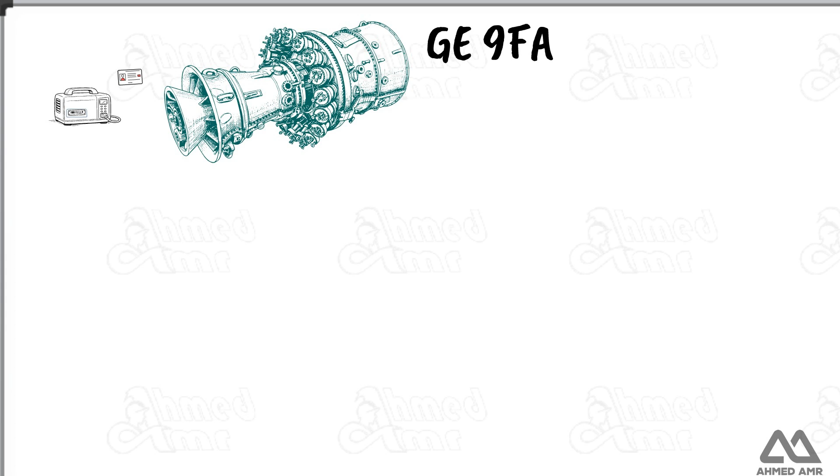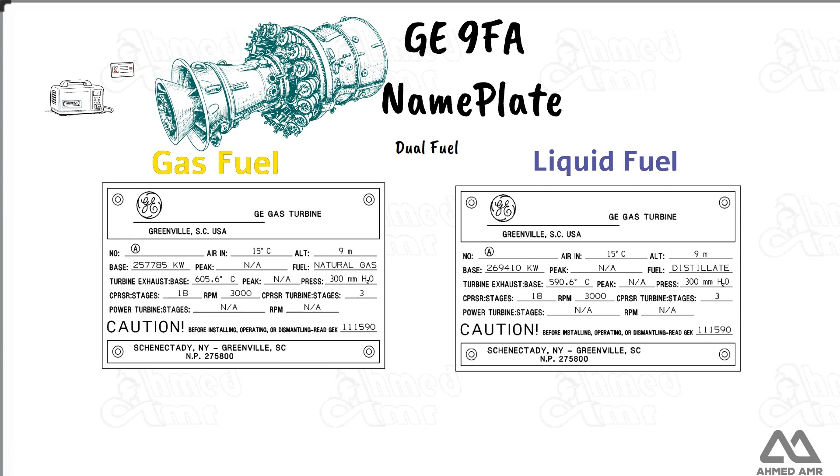Here we see the two nameplates of this unit, one for gas fuel operation and the other for liquid fuel or diesel, because this turbine is dual fuel. Let's start with gas operation. At the top, we see the title GE Gas Turbine and the General Electric logo.

This information indicates the place of manufacturing or assembly, which was done at the GE factory in Greenville, South Carolina, USA. Here, there is a space for the turbine's serial number. Each unit has a unique serial number that identifies it in the manufacturer's records. For example, 298742. This number is mainly for the manufacturer's internal reference.

Next, we have the air inlet temperature according to standard design conditions, known as ISO conditions. This means the performance listed on the nameplate is calculated at an air temperature of 15 degrees Celsius. The altitude above sea level is listed here as 9 meters. Now we see the fuel type, natural gas. This means all the following data is calculated for operation on natural gas.

The word base refers to base load, which is the maximum continuous load of the turbine as tested in the factory under the stated conditions. The value is written in kilowatts, which equals 257.8 megawatts. For peak, we see NA, which means there is no data for peak load. This unit is designed to operate at base load only.

Now let's look at the exhaust gas data. The exhaust gas temperature at base load is 605.6 degrees Celsius. There is no peak value as mentioned earlier. The pressure shown here refers to the exhaust pressure leaving the turbine. Its value is 300 millimeters of water column, which is approximately 0.42 psi, or 0.03 bar.

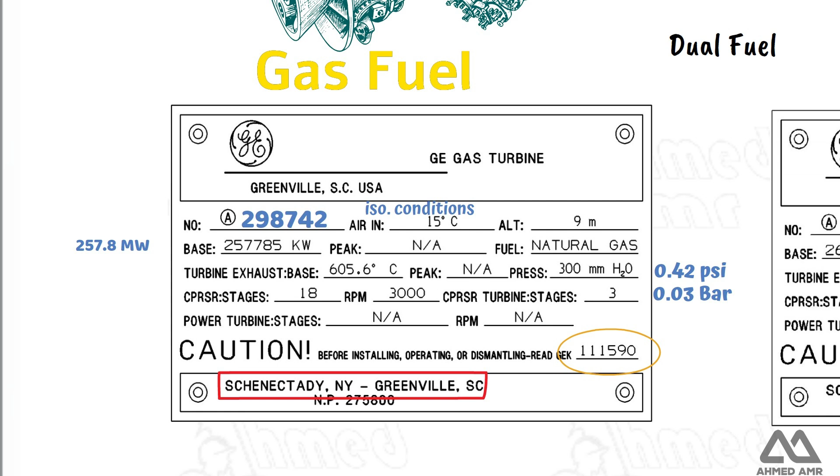Below that, we find a safety warning. It states, before installing, operating, or dismantling, read the manual with this number. This refers to the General Safety and Instruction Manual. At the bottom, we see the main GE locations, Schenectady, New York, and Greenville, South Carolina. Finally, this is the design number or internal code of the nameplate.

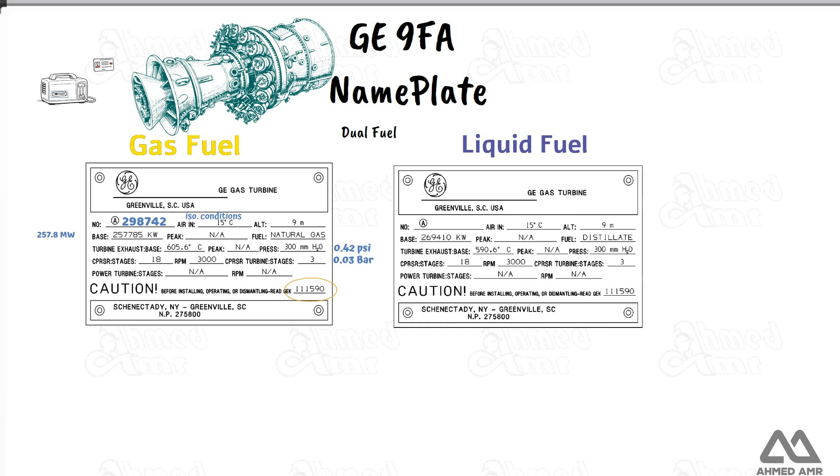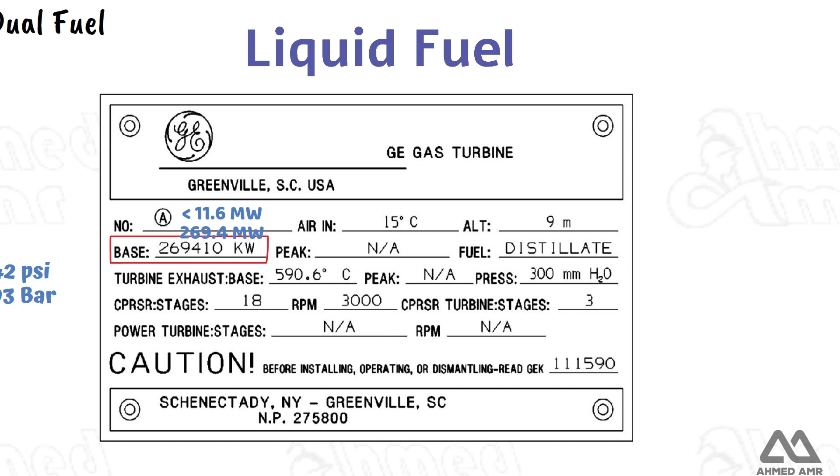Now, let's move to the nameplate for liquid fuel operation, also known as distillate. It states that the fuel used is light diesel fuel or distillate fuel oil. Changing the fuel type affects both the output power and the exhaust temperature. Here, the output power is 269.4 megawatts, which is higher than gas operation by about 11.6 megawatts. At the same time, the exhaust temperature is lower than gas operation by about 15 degrees Celsius. The rest of the data remains unchanged.

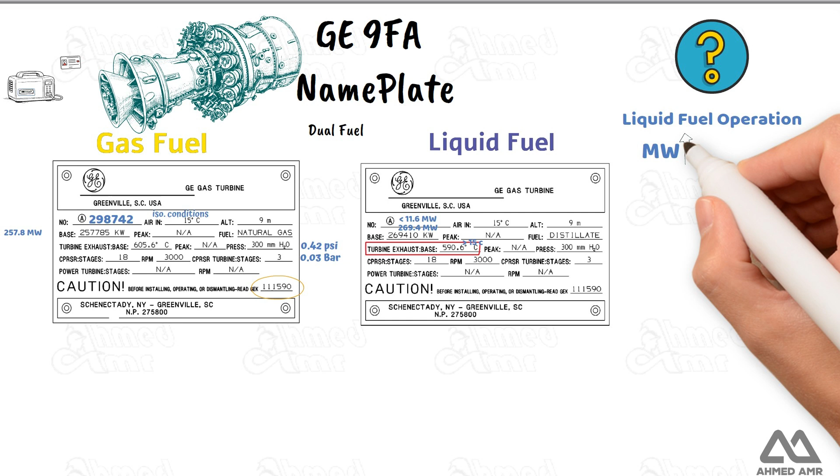Now, a question for you, and I will wait for your answers in the comments. Why does operating on diesel increase the power and reduce the exhaust temperature under the same conditions compared to gas operation? If you like, we can answer this question at the beginning of the next lesson.

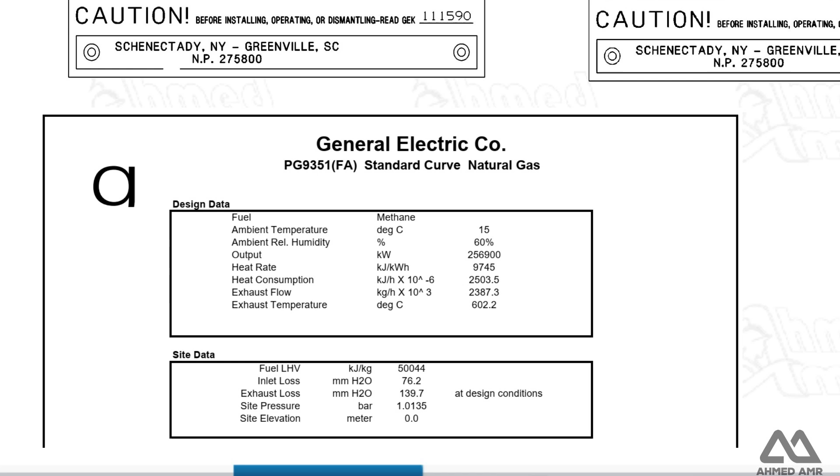Now we move to another file that contains data related to the turbine and the site where it is installed. These are real operating data, and they may differ slightly from the ideal conditions listed on the nameplate. In the table called Design Data, we find the performance values that the manufacturer guarantees if the specified conditions are met. The first item is fuel type.

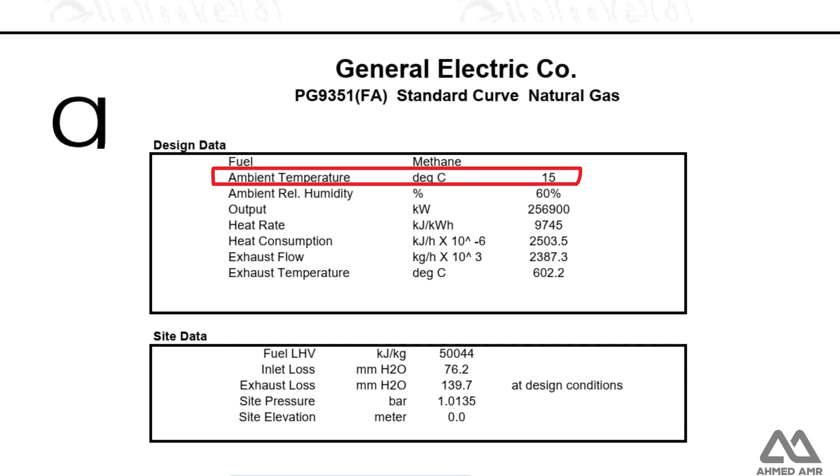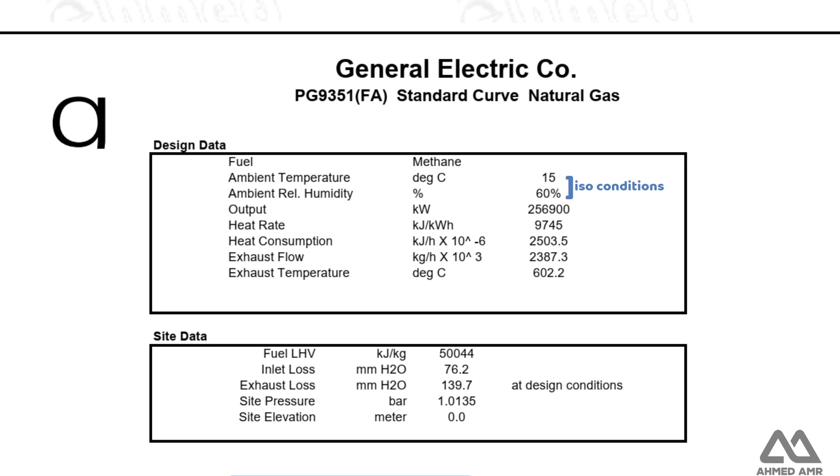The fuel here is methane, which is the main component of natural gas. The ambient temperature is 15 degrees Celsius, and the ambient relative humidity is 60%. Together, these are called ISO conditions, which are the standard reference conditions used to measure turbine performance. Of course, these conditions are not always available. This means that if the temperature is 15 degrees and the humidity is 60%, the performance will be as stated. Under these standard conditions, the output power is about 257 megawatts.

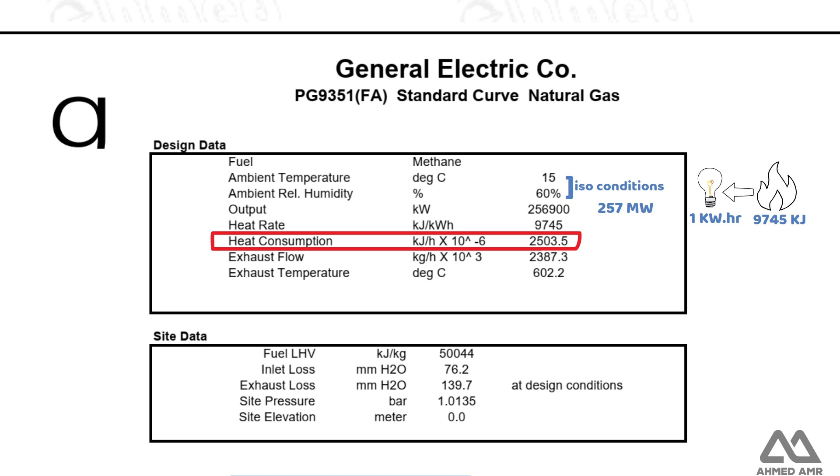Next, we have the heat rate, 9,745 kilojoules per kilowatt hour. This means to produce 1 kilowatt hour of electricity, the turbine needs 9,745 kilojoules of heat from the fuel. The heat consumption represents the total thermal energy the unit consumes per hour at full load. In this case, the unit consumes about 2.5 billion kilojoules per hour under ISO conditions. Simply put, this value is the heat rate multiplied by the power output.

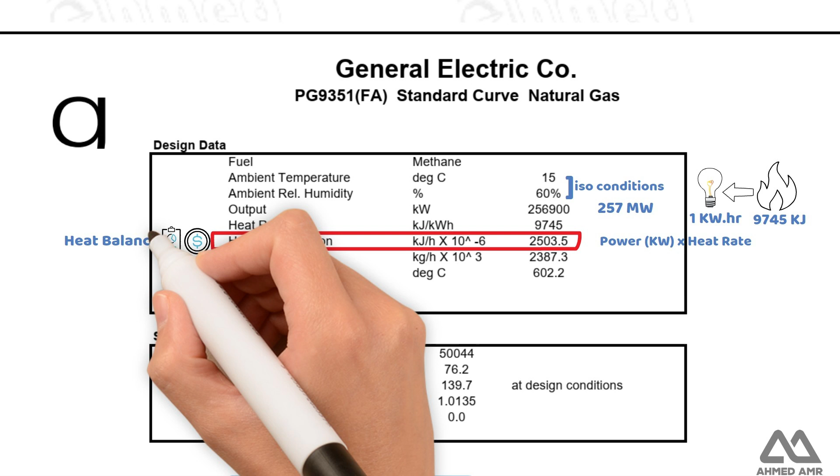Why is this number important? It is used to calculate daily fuel cost in performance reports and in heat balance calculations for combined cycle power plants. Next, we have the exhaust gas flow rate, which is 633 kilograms per second. This value is very important for the design and calculation of the heat recovery steam generator in combined cycle operation. And here we see the exhaust temperature at base load.

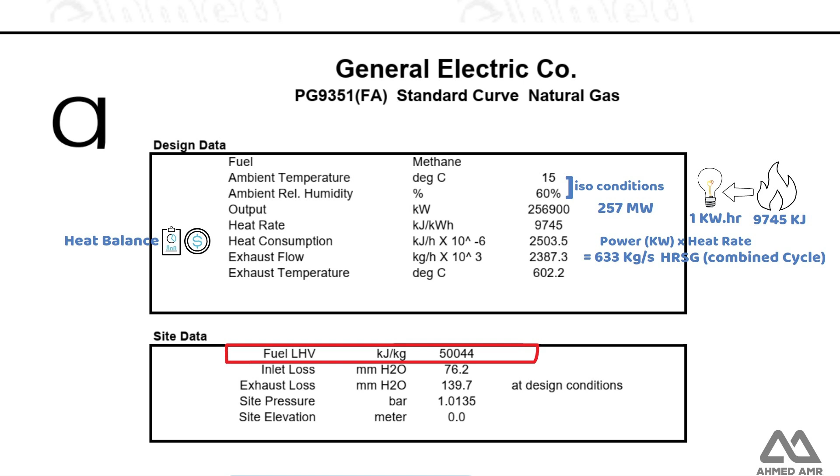The second table is called site data. It represents the real operating conditions of your actual power plant site. The first item is fuel lower heating value, or LHV. This represents the useful thermal energy obtained from burning 1 kilogram of fuel. In this case, burning 1 kilogram of gas produces 50,000 kilojoules of useful energy. The lower heating value of gas is not constant.

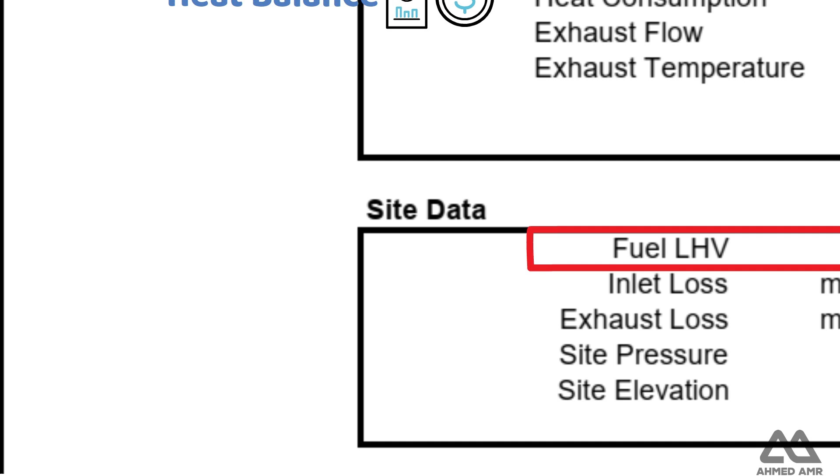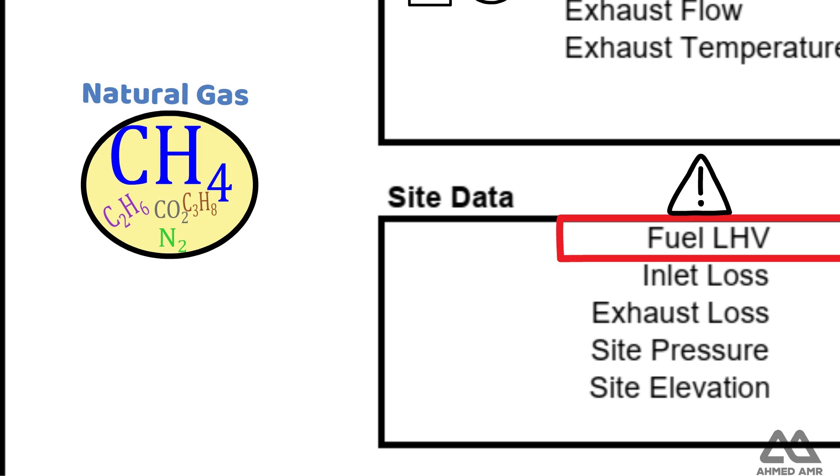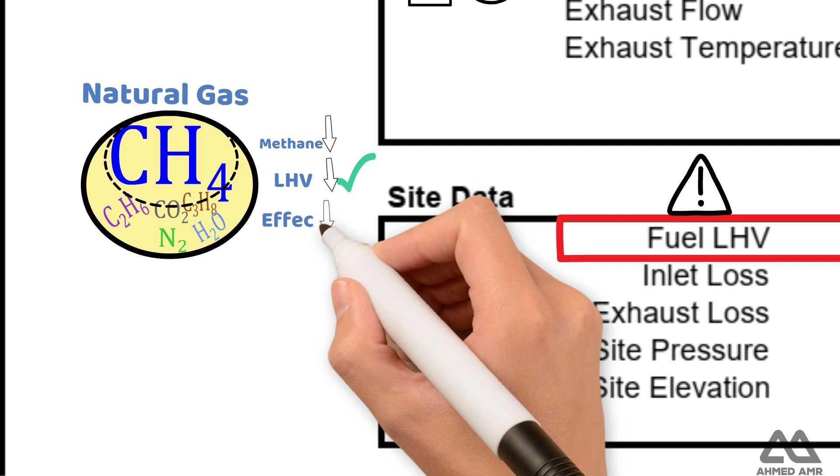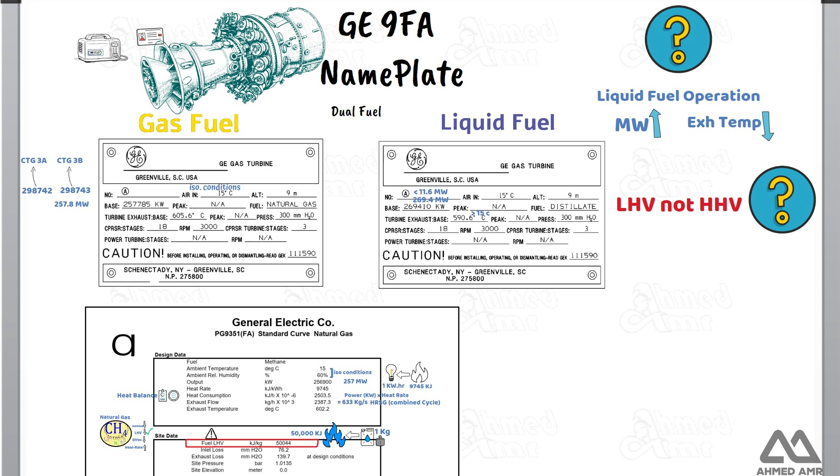The chemical composition of natural gas varies from field to field. Each field produces gas with a different mixture of methane, ethane, propane, nitrogen, carbon dioxide, and water vapor. The higher the methane content, the higher the LHV, and the better the fuel quality. If the methane content decreases, overall performance drops. Efficiency decreases, heat rate increases, and fuel consumption increases. Another question for you. Why do we use the lower heating value instead of the higher heating value in gas turbine calculations, and what is the difference between them?

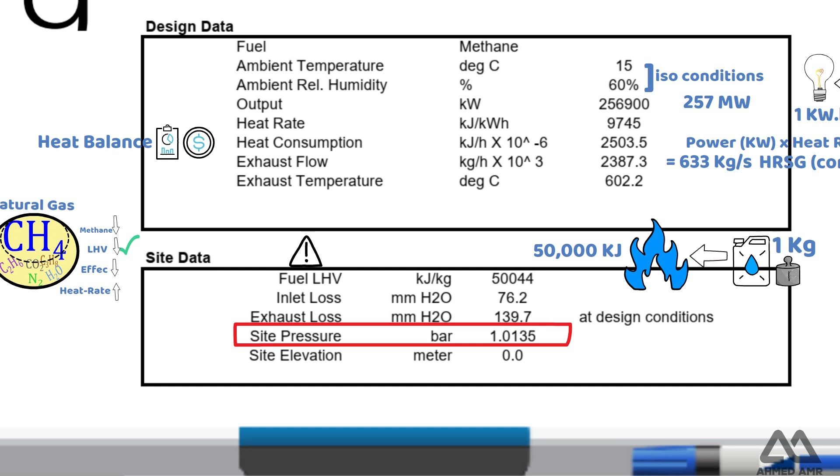Next, we have inlet loss, 76.2 millimeters of water column. This is the pressure loss at the air inlet caused by filters and ducts. The higher the inlet loss, the lower the turbine performance. Exhaust loss is 139.7 millimeters of water column. This represents the actual exhaust pressure loss measured on site. Site pressure is 1.0135 bar, which is the atmospheric pressure at the plant location. Site elevation is 0 meters, meaning the plant is located at sea level.

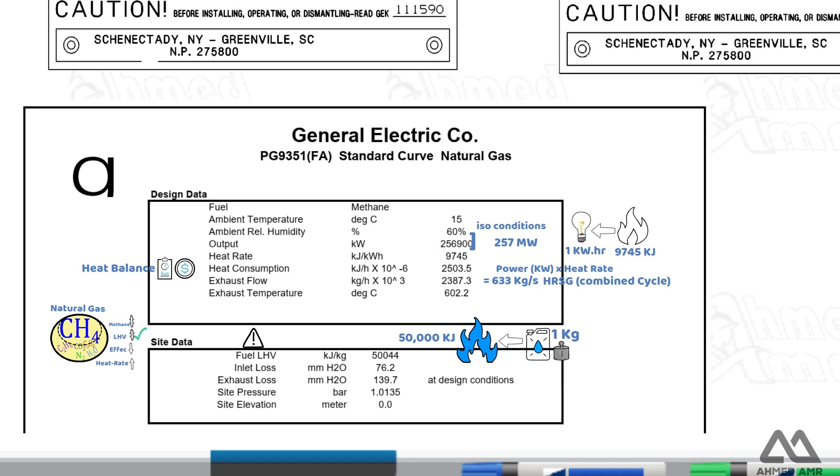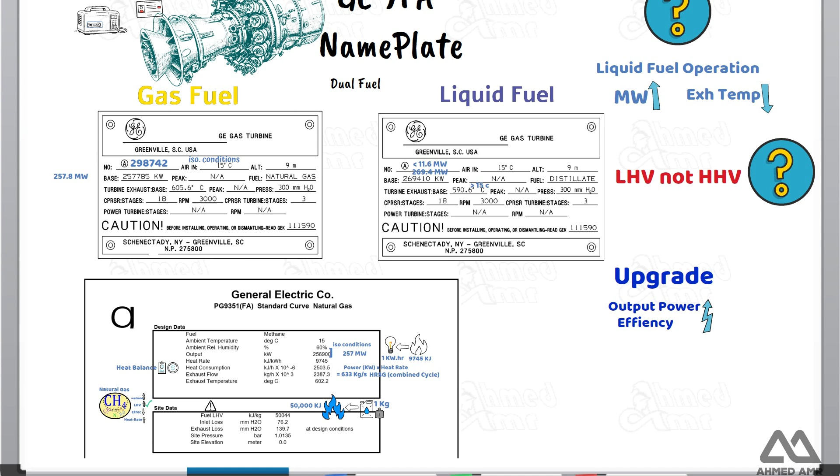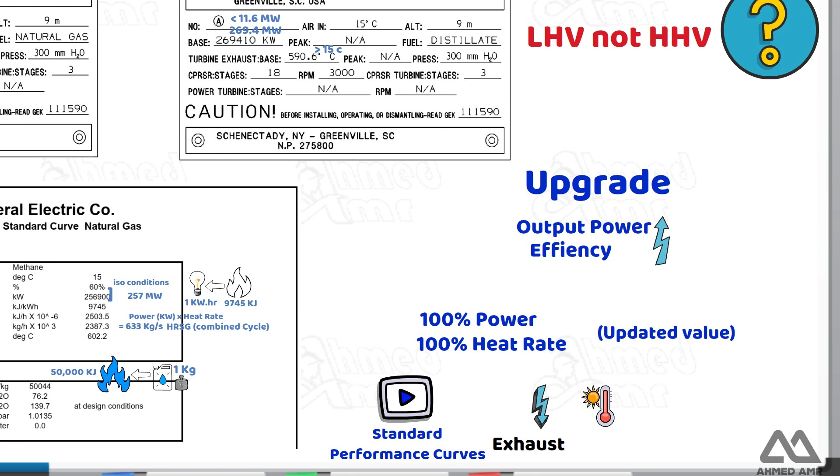Sometimes major upgrades are carried out on the turbine. These upgrades improve both output power and efficiency. Because of this, the rated power and rated heat rate values must be updated to the new ones. So when we say 100% power or 100% heat rate, we mean these updated values. In the next video, we will explain the standard performance curves. How much does performance drop when ambient temperature increases? What happens to exhaust temperature when the load changes? And how does turbine performance change?